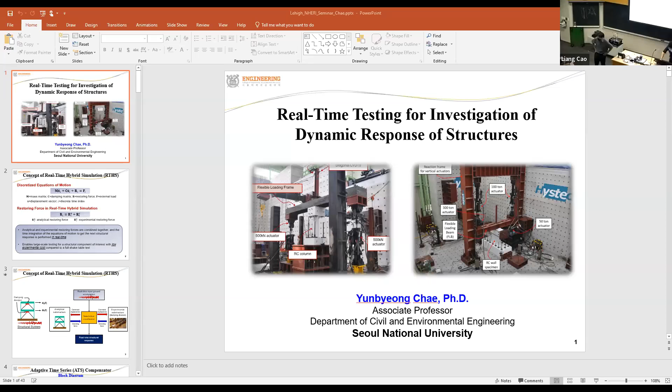You have to allow the... Yeah, I think we can start. I forgot the introduction material. Does anyone can see the screen? Yes, it's good, Liang. I think, Jim, you want to introduce? Well, I left the material at home, it's not going to do me any good, I don't know where it is. I need the abstract, let me go for it. You don't have a copy of the abstract?

Jim, I have it, would you like me to announce? Well, I guess you're going to have to introduce. Okay, are we ready to go? Yeah, okay. Liang, just let me know when you're ready and I'll introduce. Chad, I can do the introductions. Okay, go ahead then, whenever you're ready.

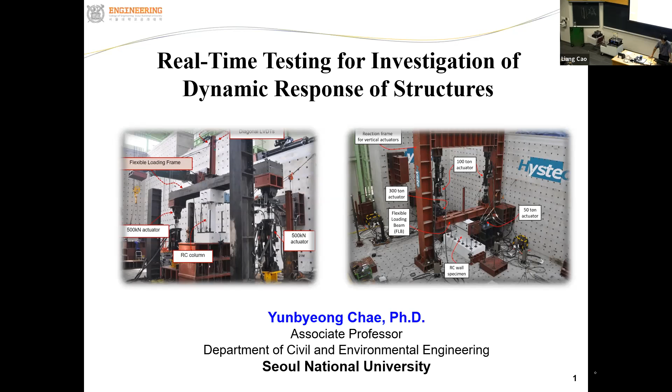Okay, today I'm going to talk about real-time testing, focused on real-time hybrid simulation and real-time cyclic loading tests for investigating the dynamic response of a structure. I guess many people are now quite familiar with real-time hybrid simulation, but some people may not be.

So let me briefly talk about the concept of real-time hybrid simulation. In real-time hybrid simulation, we have analytical substructures and experimental substructures. So unlike other shake table testing, we don't construct the entire structural system. We just manufacture and construct the structural component of our interest, and then test it in the lab. The remaining part of the structural system is modeled numerically.

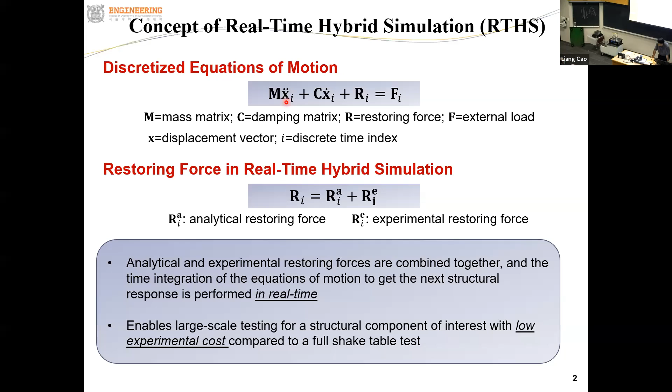So here you can see... let me change the pointer here. Okay, so the equations of motion: generally we separate this restoring force term, the restoring force coming from the analytical substructure and the restoring force coming from the experimental substructure. They are combined together, and then this equation of motion is solved numerically to get the structural response at the next time step. As I said, because we only test the structural component of interest, which is generally small compared to the entire structural system, real-time hybrid simulation is very cost-effective and good for conducting large-scale testing.

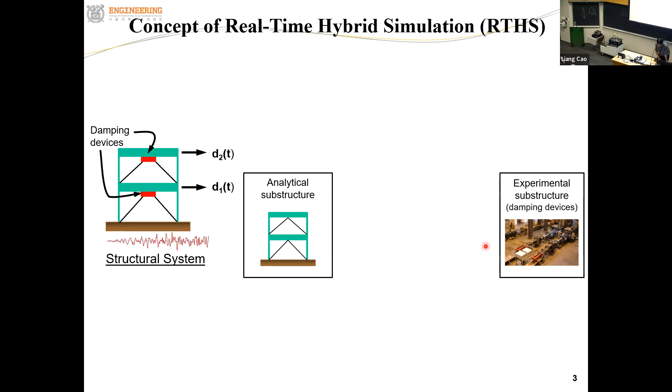Okay, let me explain further about real-time hybrid simulation using this figure. Here we have a two-story building structure with dampers in the first and second story. Let's say the damper has highly nonlinear behavior, which is difficult to analytically model, and the remaining structural system is relatively easier to analytically model. Then in real-time hybrid simulation, this entire structural system is divided into two components: the analytical substructure that consists of the entire building structure except for the damper, and the damper, which can be tested in the lab using a hydraulic actuator system.

Then we have the simulation coordinator combining these two substructure systems. It also has actuator delay compensation and the numerical integrator. So we input the earthquake ground motion to the simulation coordinator, then it provides the command displacement to both substructures. Then the simulation coordinator collects the restoring force from each of these substructures.

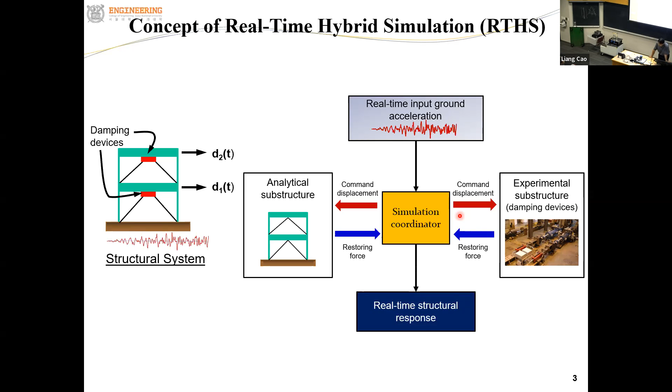Then the equation of motion is solved numerically to get the structural response at the next time step. If all of this procedure is conducted in real time, then we call this test the real-time hybrid simulation. Otherwise, it is called the slow hybrid simulation, or sometimes just hybrid simulation.

Because we have the numerical substructure, analytical substructure, and experimental substructure, they should be synchronized at the same time without any significant time delay during the simulation. In order to achieve that, it is very important to have good actuator control without significant time delay, a good and stable integration algorithm, and a very accurate displacement control algorithm.

For that, we developed the actuator delay compensation algorithm, which is called the adaptive time series compensator.

There are many existing displacement control algorithms for actuators, but most of them require system parameters that should be calibrated in advance. These system parameters are quite different depending on the hydraulic system and test specimen, so it's quite cumbersome work. Even if we believe we have the optimal calibration of these system parameters in advance, during the test we cannot guarantee if those values are working well or not.

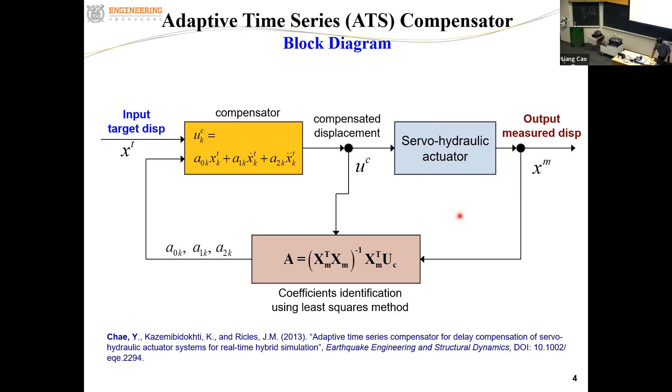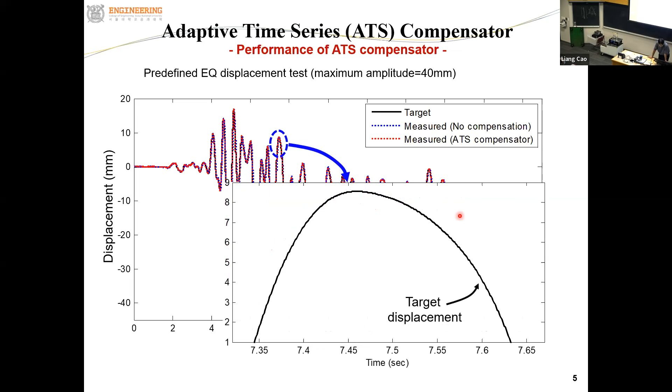But if you look at the close-up view of this area, you can see the difference. Here you see the target displacement. If you don't use any compensator, you see the delayed response, which is about 21 milliseconds here. But if you use the ATS compensator, you can see a good match between the measured displacement with the ATS compensator and the target displacement.

Someone may say that the 21 millisecond time delay here really matters. Yes, the answer is yes. Depending on the complexity of the entire numerical system, this amount of time delay can result in inaccurate response as well as stability issues. So we really need to resolve this kind of time delay issue for the control of the actuator.

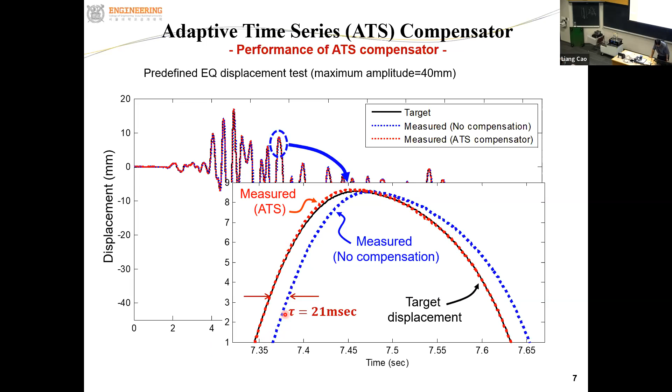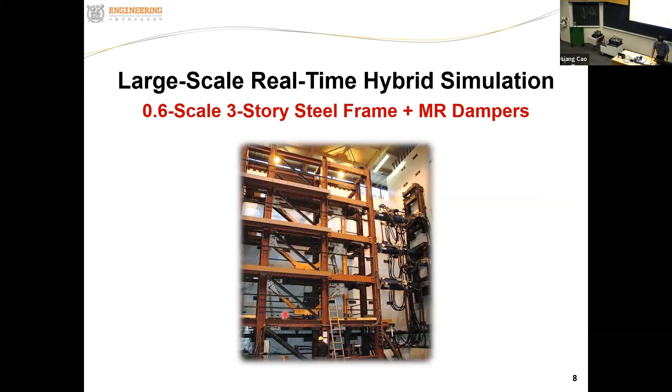Now I'm going to show some experimental test results for the real-time simulation and some real-time dynamic test. Here we have the three-story steel frame building with two MR dampers in the first and second story.

As you can see here, that's the floor plan, and we have the moment resisting frame along the perimeter of this building. Inside of this building, we have this DBF, damped brace frame, where the MR dampers reside. In this simulation, we only considered one quarter of this entire floor plan, assuming unidirectional earthquake ground motion and the symmetry of the building.

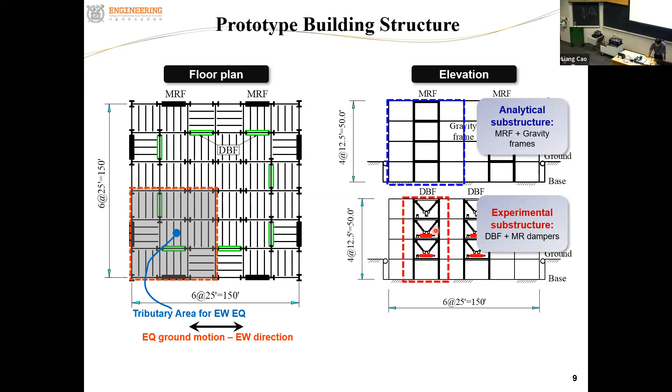So for the real-time hybrid simulation, the MRF here along the perimeter of this building and the gravity frame are analytically modeled. The DBF and the MR dampers in the first and second story are physically manufactured and tested in the lab, consisting of the experimental substructure.

That shows the test setup for this real-time hybrid simulation test. You can see the big frame here. This is not the test frame; they are just the reference frame to hold the test frame inside. You can see the test frame DBF inside of this giant big frame, the first story MR damper here and second story MR damper there.

And at each floor level we have a large capacity dynamic actuator connected.

Three actuators, but it's the unidirectional one. You can tell how big this test setup is by comparing the height of the person here. That's pretty big, although it's the 0.6 scale test setup.

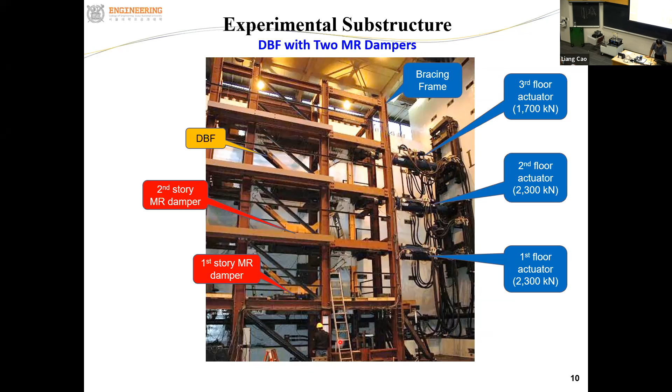Let me show you the video we captured during the real-time hybrid simulation. You can see the actual movement of the frame and the MR damper from here, the motion of the MRF and the gravity frame, as well as the damper hysteresis for the first story and second story MR damper. And you can see the floor displacement from this window.

Let me start the video. Oh, it doesn't work. Sorry, you have to get out of pointer mode. You have to get into pointer option. Go. So you have to unclick the laser pointer. There you go. Okay, thank you. All right.

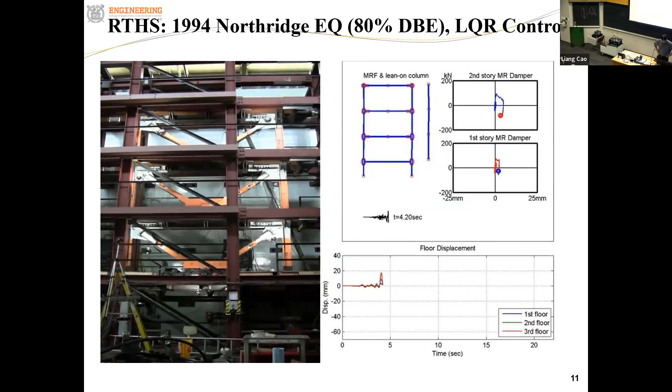Okay, so the displacement was not so large and we didn't have any failure here. Some people probably expected kind of a collapse after this test, but because we used the MR dampers, we achieved good energy dissipation so that the displacement was not so large. Anyway, we were able to achieve a successful real-time hybrid simulation result.

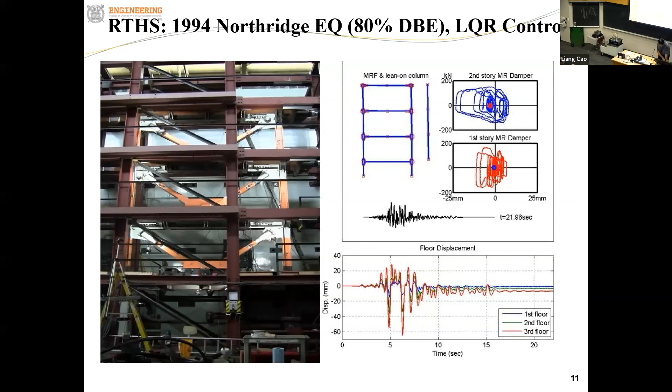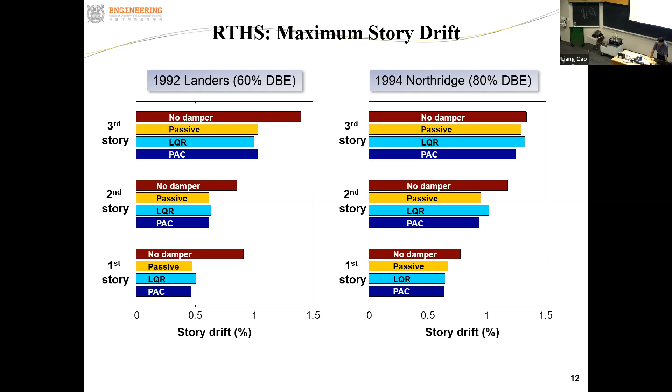From this result, we were able to compare the performance of the semi-active control algorithm and the passive control case. So that's the result for the performance comparison: without the damper, no damper case, and the passive control, LQR, and the PAC—these two are for the semi-active control. But we are not able to see any significant difference between the passive control and the semi-active control after this test.

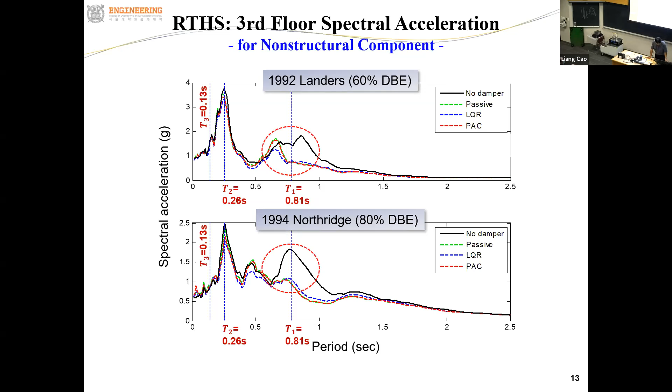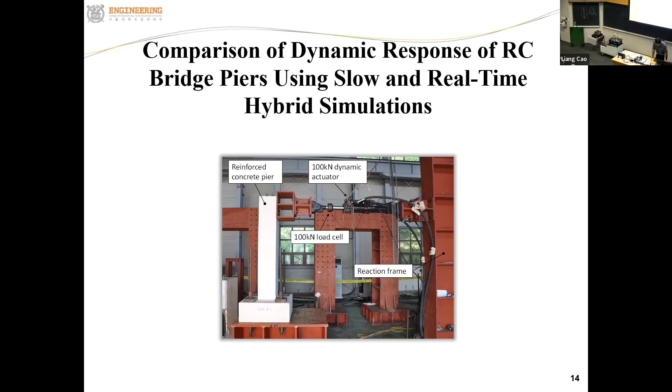All right, that was the other test while I was a postdoc at Lehigh. After that, I conducted some tests in Korea using another test setup there. This one is for the real-time hybrid simulation for a two-span bridge. Let me show you some of the features of this test.

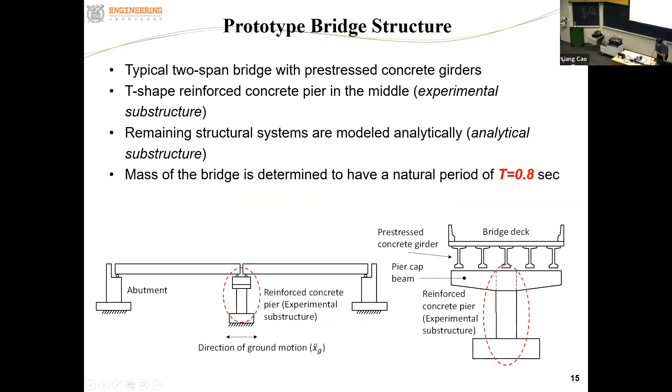We conducted some hybrid simulation, real-time hybrid simulation and slow hybrid simulation for the two-span bridge. In this test, the bridge pier, a reinforced concrete bridge pier in the middle, was tested experimentally in the lab, and the remaining structural system, the superstructure of the bridge, was analytically modeled as a single degree of freedom system.

So that shows the test setup for this real-time hybrid simulation is pretty simple. We only use one actuator controlling the horizontal displacement of the bridge. That's the actuator, and this represents the bridge pier in the middle. Its height is about 1.55 meters, and it has a square shape cross section.

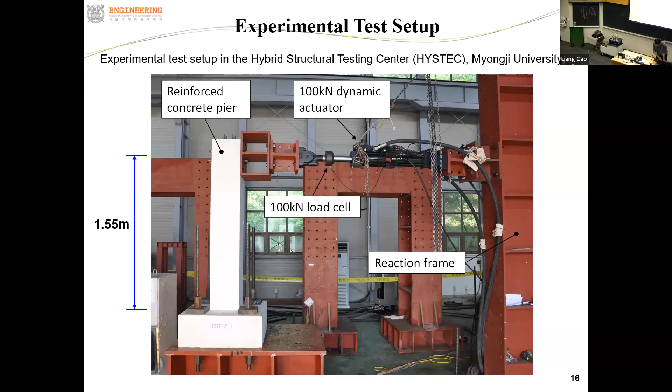Obviously, the bridge pier is subject to axial force, but at the time we didn't have any good control algorithm or knowledge for axial force control in real time. So we were not able to apply the axial force, and we just decided to apply the lateral displacement only. That's why we used the single actuator like that.

Before we conducted the hybrid simulation, we conducted some slow cyclic loading tests and fast cyclic loading tests with different loading velocities, because we were curious about the rate dependency of this kind of structural system. As we know, seismic loading is real-time and dynamic, but most of the existing tests in the lab conducted so far are very slow tests. I was curious why we should conduct slow tests rather than real-time and dynamic ones. Yes, we conduct those tests using the shake table, but if you just use the hydraulic actuator and only test part of the structural system, most existing studies only conduct slow tests. I was curious why we should do that, because it wasn't so natural for us.

So in order to see any difference between the slow test and the real-time test, we conducted tests with the same displacement history but different loading rates—the same displacement history for the slow test and the fast test. But as you can see here, the time duration for the slow test and the fast test are quite different. The maximum velocity for the fast test is 220 millimeters per second; the slow test is 2.1 millimeters per second. And this is the hysteresis loop after these two tests.

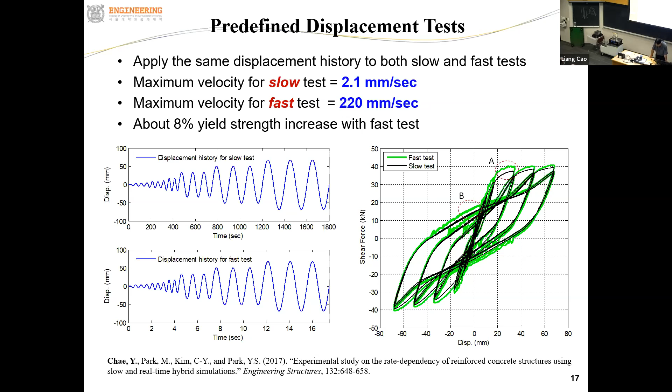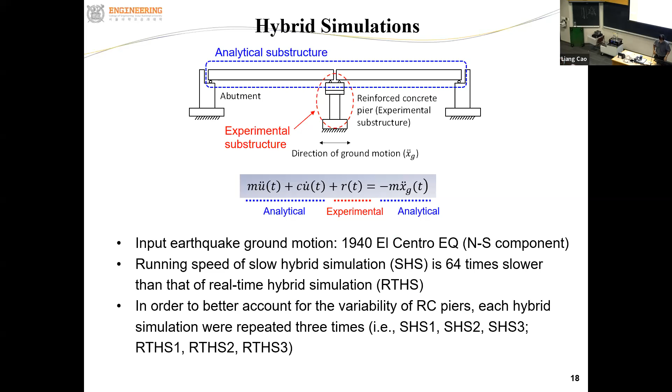Now, after this cyclic loading test, we conducted real-time and slow hybrid simulation to see if there's any significant difference depending on the loading rate. This shows the hysteresis loop after the slow and real-time hybrid simulation—red is for slow, blue is for real-time. Because of the increased strength with the fast loading rate, and increased energy dissipation, we obtained reduced displacement, as you can see here, when conducting the real-time hybrid simulation.

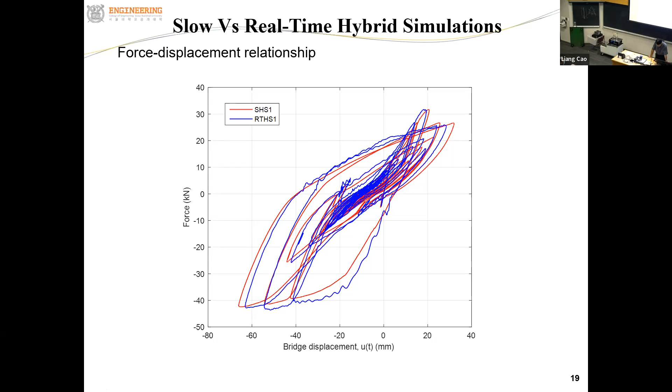So that means, if we conduct real-time testing, we probably get a conservative test result, which may be okay, but we cannot conclude this is the general case, because this is just a test without axial load and just for the selected structural system.

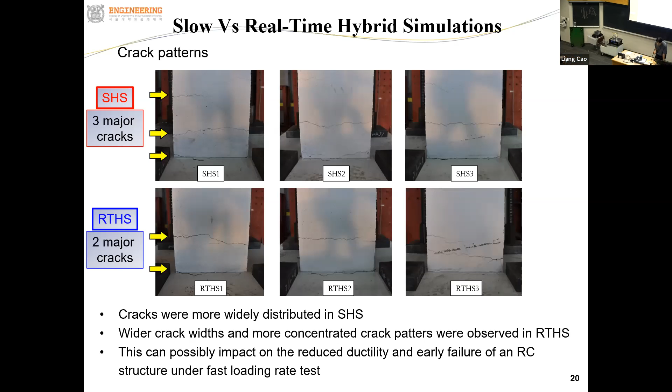If we can do the real-time testing, why not? Why would we only conduct slow testing? We can obtain a better, more accurate structural response by conducting real-time testing.

After the test, as I said, we were only able to apply horizontal force or displacement. Axial force was very difficult to control at the time. So we developed a new axial force control algorithm and conducted a new test with the axial force applied.

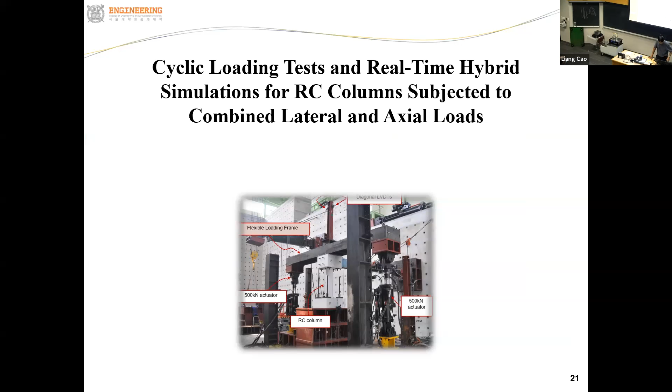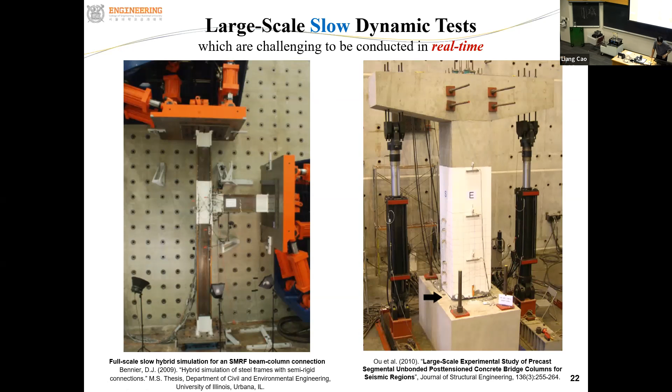So to resolve this issue, we developed a new force control algorithm called the DATS force control method. The idea is very simple: we inserted a compliance spring, or linear spring, between the actuator and the test setup. According to Hooke's law, as long as this spring behaves linearly elastic, the spring force is proportional to the spring deformation. So if we can accurately control the spring deformation using the actuator, then we can control the force applied to the test specimen—that's the basic idea here.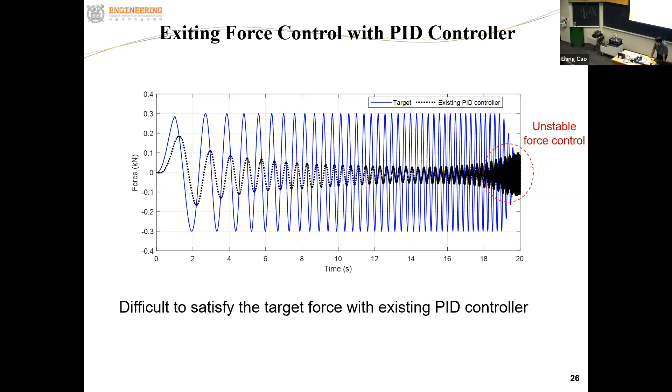So you can observe the big difference here, and also you can see the superior performance of our newly developed force control algorithm by looking at this result. Okay.

All right, so that was the result by using the coil spring for the compliance spring between the actuator and the test setup. But we are also interested in applying this method for large scale civil infrastructure systems. So in order to realize that kind of large force application, we developed a new loading frame, which is called the flexible loading frame.

As you can see here, it looks like the existing loading frame, okay? But the main difference between the existing and this new system is that in this flexible loading frame, we allow relatively larger bending deformation. When you apply the force, when you pull down the loading beam here at both ends using the actuator, then we can see this kind of bending deformation. But as long as we design this frame to behave like a linear elastic under the given maximum force, then the bending deformation at the end here will be proportional to the applied force to the test specimen.

In this case, in the middle. So the basic idea is controlling the bending deformation of this beam using the actuator installed at both ends of this loading beam. The existing loading beam has very steep, very large stiffness, so it does not allow any visible deformation at all. But for this flexible loading beam, we allow some appreciable deformation. Okay, all right.

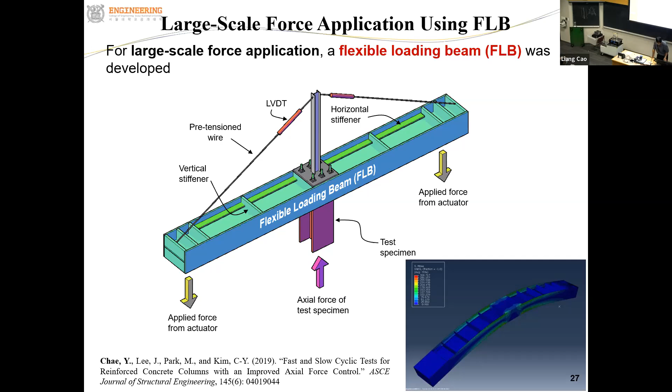So by using this flexible loading beam, we were able to apply the axial force during the real-time testing for the RC column given here. Here we have the RC column, and this is the flexible loading beam, and the two vertical actuators connected here.

Basically, we pull down the loading beam at the end, and also we control the bending deformation of this loading beam using these actuators, which is proportional to the axial force applied to the column in the middle. So we conducted some slow and fast, or real-time, cyclic loading tests for this given displacement loading history, gradually increasing the lateral displacement of this test setup.

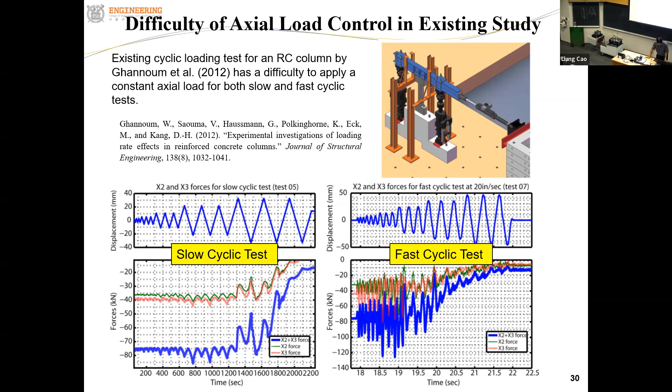You can see the large error. It's supposed to be a flat line, constant axial force, but you can see the large fluctuation, even for the slow cyclic test. That clearly demonstrates the difficulty of controlling the axial force using the existing force control method.

It also depends on the details of the rebar layout. But for this selected column system, we observed reduced strength after the real-time testing - about a 10 to 15% strength reduction, which demonstrates the importance of real-time testing.

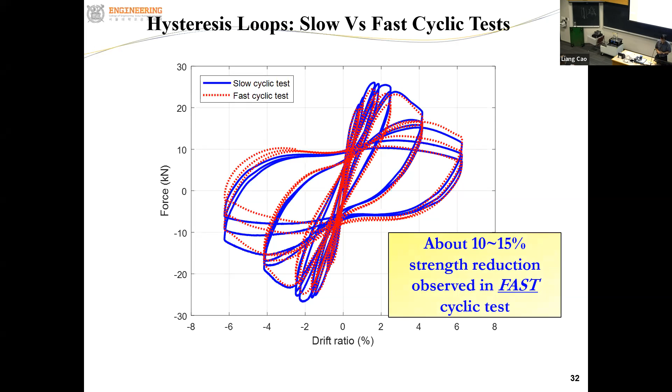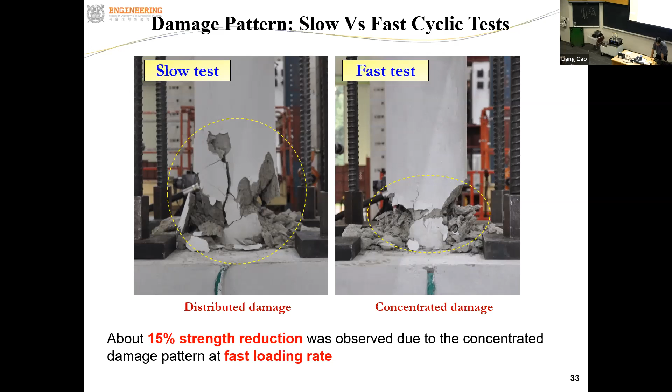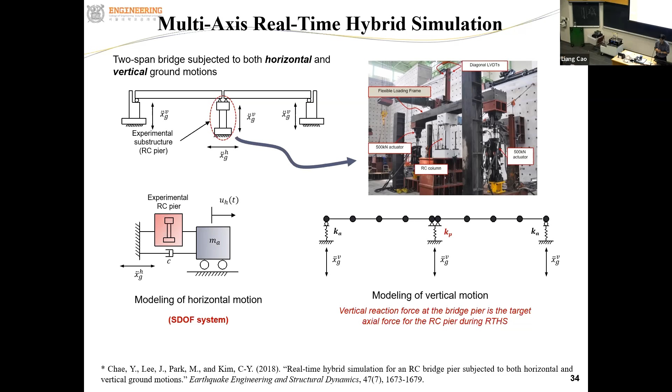So I believe it's very important to conduct real-time testing. We also conducted real-time hybrid simulation with the same test setup, but in this case we applied both horizontal ground motion and vertical ground motion, which is considered very challenging in existing studies. With this new force control algorithm, we were able to successfully conduct this challenging testing subjected to both horizontal and vertical ground motion.

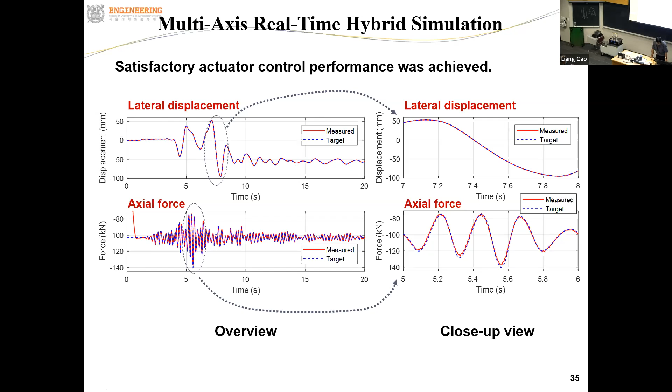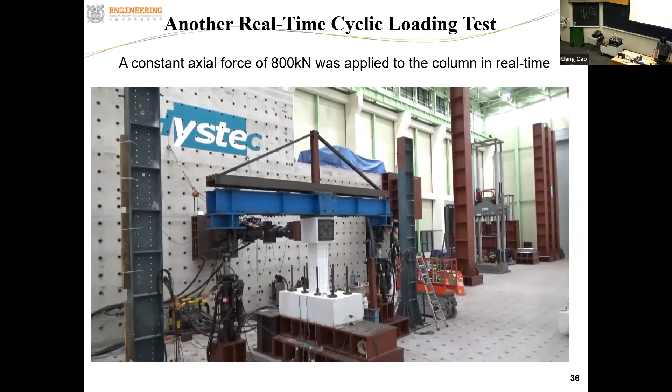We also conducted another test using the flexible loading frame. This is the test setup for the reinforced concrete shear wall of a nuclear power plant structure. That's the test specimen, an RC shear wall, subject to in-plane deformation as well as out-of-plane deformation. We apply the axial force to this shear wall using two large capacity vertical actuators connected to the flexible loading frame. This flexible loading frame was designed to have a force capacity up to 1,200 kilonewton.

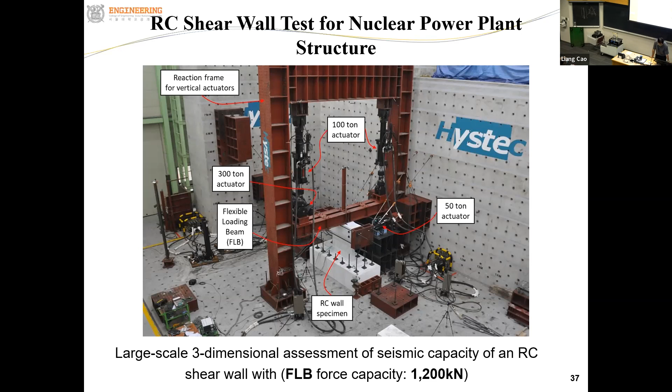We actually applied 1,100 kilonewton during the test. This kind of test was very challenging in existing studies because it was difficult to construct a test setup like that, and also difficult to apply the axial force when in-plane and out-of-plane motion are applied at the same time. But by using the flexible loading frame and the newly developed force control algorithm, we were able to successfully conduct this test. That's the result of the axial force control.

We conducted a unidirectional test and also a bidirectional test. Unidirectional means only the in-plane deformation is applied, and bidirectional means in-plane and out-of-plane motion applied at the same time. During this lateral deformation, the axial force is supposed to be applied constantly.

We conducted 5 different tests with different axial forces. The first case is the 550 kilonewton axial force, unidirectional. The purple line shows the controlled axial force. It's almost the same as the target force here.

This shows the result from the unidirectional and bidirectional loading tests with different loading patterns. The black line shows the unidirectional case with 1,100 kilonewton axial force, almost constant, which is good. The remaining part shows the axial force controlled during the bidirectional test with a different loading pattern.

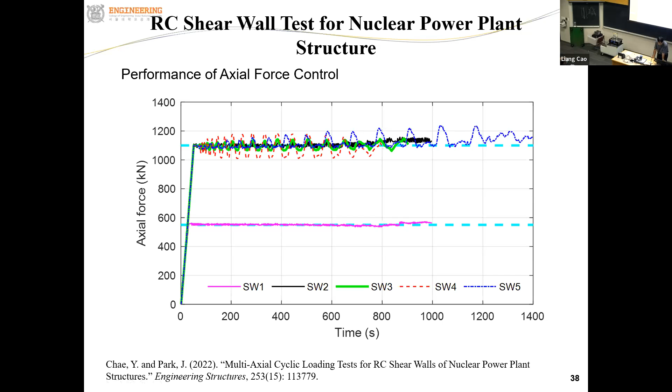We have this kind of fluctuation of the force because we didn't consider velocity feedback for the axial force control in this test. We had this fluctuation, but if we consider the velocity feedback, we would definitely be able to achieve better axial force control. Overall, we were able to achieve successful, satisfactory control of the axial force.

That shows the damage pattern after the test: a typical shear failure, and the wall was designed to have shear failure. So we have this kind of damage after the test.

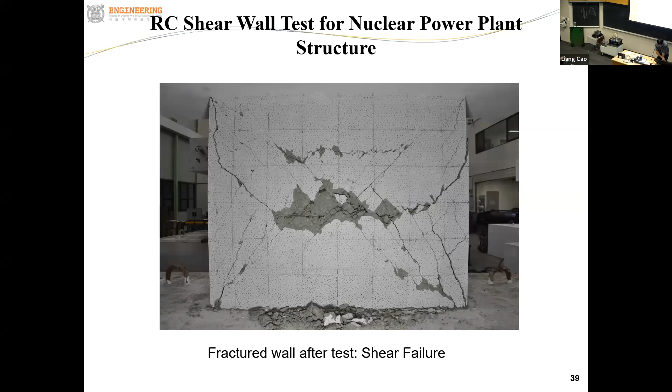This shows the summary of the test result. As I said, we conducted unidirectional and bidirectional tests, and we are interested in seeing the effect of the axial force and also the effect of bidirectional loading compared to unidirectional loading only. The left-hand side figure shows the effect of the axial force.

The low axial force case, 550 kilonewton with 4.5% axial force ratio, versus the black line showing the high axial force case, 9% axial force ratio. You see increased strength but reduced ductility. That means earlier failure of the wall is observed with larger axial force.

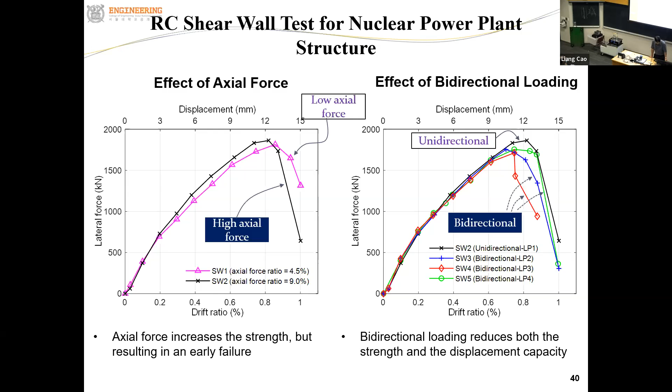We also conducted hybrid simulation with the same test setup to obtain the experimental floor response spectrum, FRS. This is related to the design of mechanical equipment inside the nuclear power plant structure. But since the nuclear power plant structure is large and massive, it is very difficult to obtain the experimental floor response spectrum.

So far, FRS was obtained only by using numerical simulation, finite element analysis. But if you use hybrid simulation, we can obtain the experimental floor response spectra.

That's the typical nuclear power plant structure. We modeled the shear wall system using this structural model, and the first story was tested in the lab using this test setup, because when you have a strong earthquake, the damage will be concentrated in the first story. So the second and third story will pretty much remain linear elastic.

We modeled this part using the tri-linear model, and the first story shear wall is experimentally tested using this test setup. This shows the experimentally obtained floor response spectrum with different intensities of earthquake ground motion.

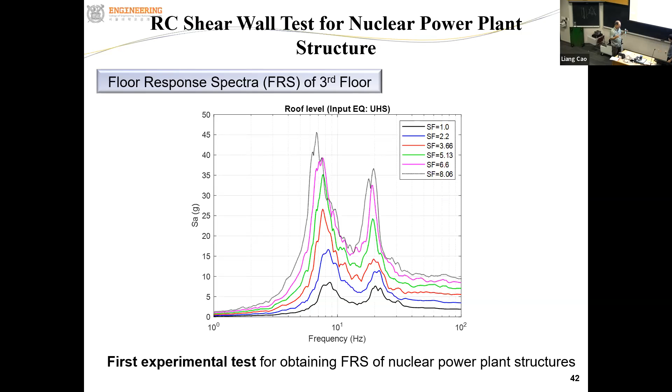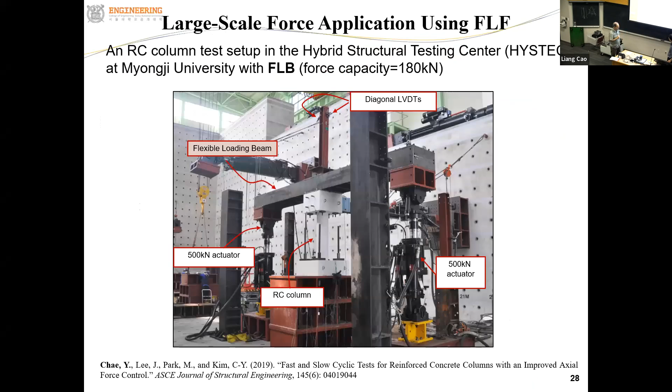I have a question. The compliance there is going to also be influenced by the compliance of the test specimen itself, especially axially. These specimens are very rigid, very low compliance. What happens if you have ones that basically have more coupling, more compliance in the test specimen? The axial force is still probably more challenging because the deformation in the spring will develop a force, but it's going to also rely on the deformation of the specimen that's more or less either in series or in parallel, right?

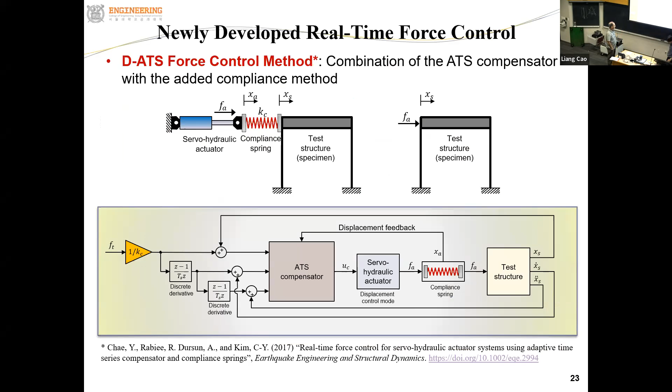Exactly, yes. That's why for this test setup, we installed the ability to measure the displacement of this test setup. It is considered in the force control for controlling the deformation of the compliance spring.

This I guess wouldn't matter too much if the spring here was nonlinear, it would still work as long as you use feedback from your LVDT on the right side. Exactly, we also needed to, in order to achieve better performance, include velocity feedback in this algorithm. For this test, velocity feedback was used so that we were able to achieve this kind of good force control.

So when you did that in the ATS, you feedback the displacement, but you still consider the numerical terms there. Exactly, right, second and third. When you did these tests, did you ignore that velocity and acceleration? Did you say you ignore the velocity effect, or did you?

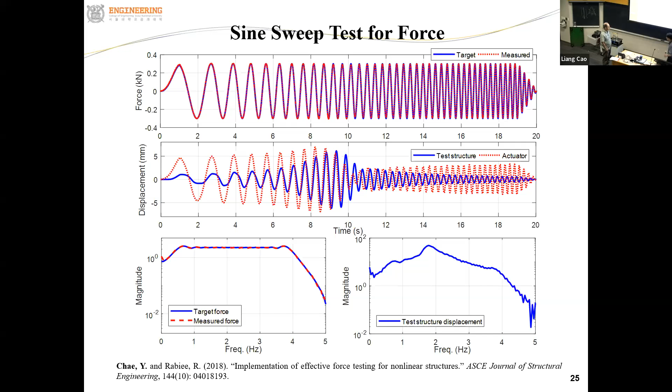That's a good question. It is very important to consider the velocity of this compliance spring. We needed to know the velocity of this actuator, which can be obtained from the time differentiation of the target displacement. That's given in advance. So we can achieve the smooth target velocity.

However, it is difficult to achieve smooth velocity feedback for the test setup. What we did for that part is we measured the acceleration of this test setup. We installed an accelerometer as well, then integrated the acceleration data. Then it is combined with the time differentiation of the LVDT displacement, which was filtered out. There's actually a time delay, but that time delay was compensated by using the integration of the acceleration data. It's a little bit complex, but by using these two, we are able to achieve smooth velocity feedback of this test setup.

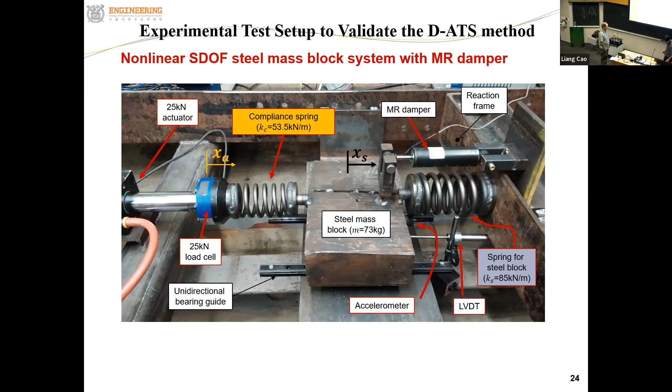So when you have the compensated signals, it's not necessarily displacement, it's velocity - so u dot c rather than u. Yes, exactly. Actually, the displacement is also important - both the displacement and the velocity. If you use velocity feedback... for this column test, we didn't use any velocity feedback at all. That's why we have this kind of fluctuation.

But I think the challenge is if you try to, you have a choice, either displacement or velocity, because both are related through time. If you decide you're going to compensate velocity, you're more or less stuck with imposing displacements over a certain ramp period. Whereas if you control the displacements, then the velocity is a result of that - just like if you control the velocity, the displacement is a result of that. So you have to decide whether it's u dot or u sub c, I guess. And you think u sub c dot, the velocity, is better than the displacement.

Yes, exactly. And also we are working on developing a new force control algorithm because this force control algorithm requires velocity feedback for better performance. But we always need to have some kind of velocity sensor for that, and I was not able to find any good velocity sensor for that. So that's why we use the accelerometer. But we need to have more channel accelerometer sensors, and we need to have some kind of process for the data with that. We are working on a new force control algorithm that can be obtained directly from the force feedback and the displacement feedback. So we're working on that, and hopefully we can see some results this fall semester.